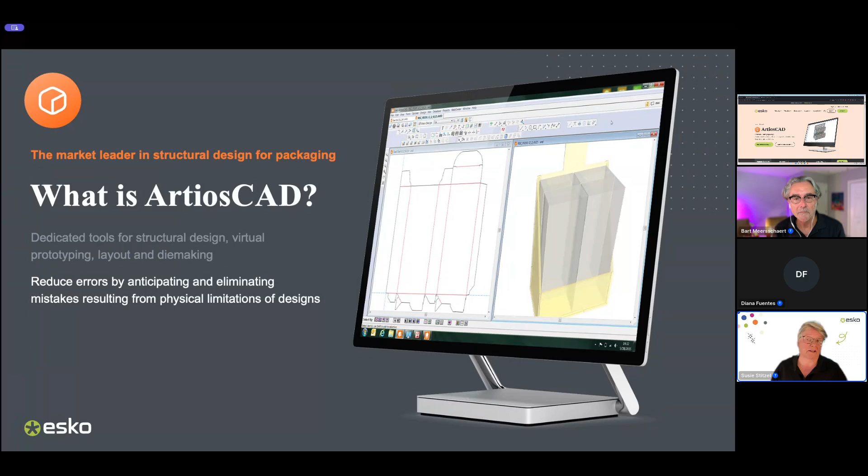A couple of things - optimized for packaging for sure. You may or may not be aware, but the product ships with a large number of standards or resizable designs, hundreds of them, from FEFCO and ECMA for example, or you can create your own. It's pretty easy to do that with these really intelligent drafting tools.

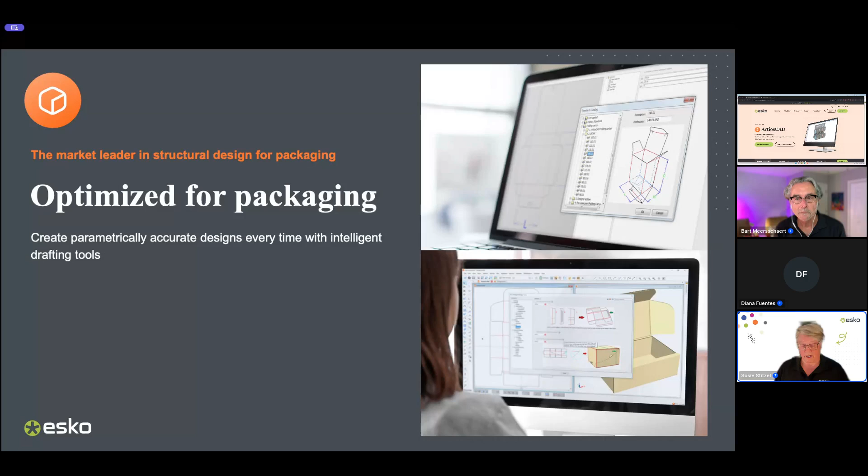There's also a really nice pre-flight tool that allows you to check a design against certain parameters. Just like you pre-flight your artwork, you can pre-flight your CAD designs and find things, and a lot of times pre-flight can even fix them for you, so that's even better.

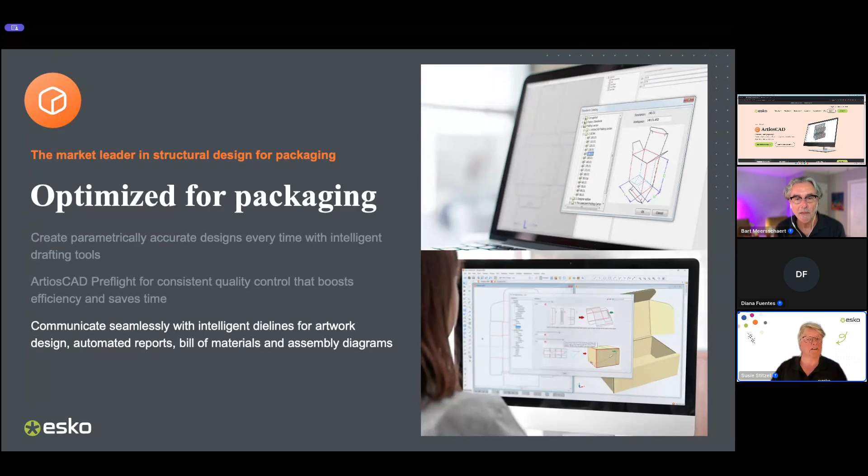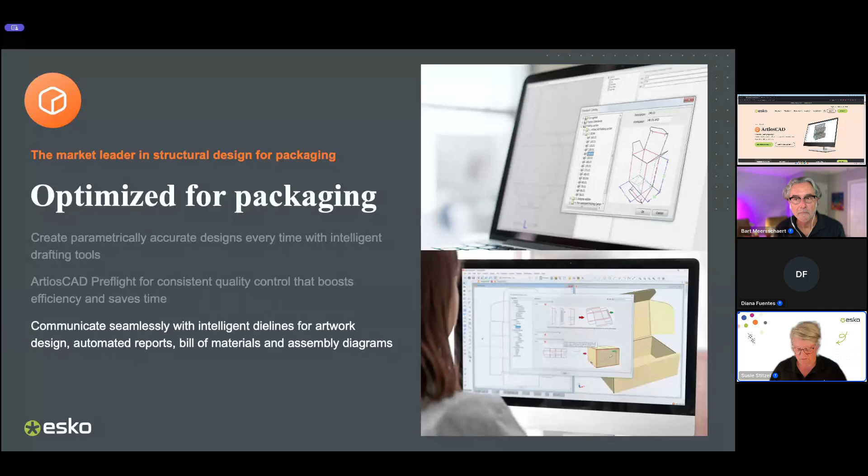We can communicate seamlessly. We can use intelligent die lines and send those over to the artwork operator - all the keep away areas, don't print here, where's the glue flap. Also inside ArtiosCAD, generating automated reports and bills of materials, assembly diagrams - all those things that are kind of extra work or grunt work, the solution can actually do for you. Again, it's about speed and accuracy.

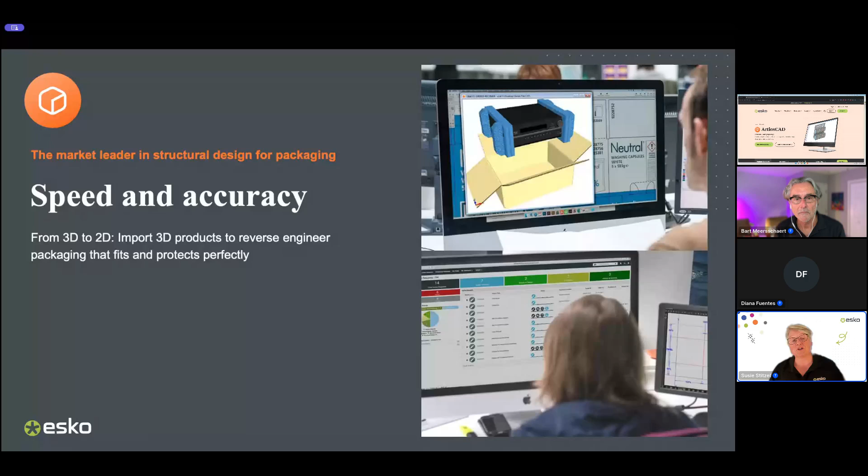One of my favorite things about ArtiosCAD is to really be able to work or start in 3D and have the software figure out what the 2D is. Being able to reverse engineer the packaging that fits and protects the product perfectly is fantastic.

ArtiosCAD also comes in a version called ArtiosCAD Enterprise. It's basically a centralized, secure database that makes your CAD department available to everyone in the company or people outside the company, sort of based on WebCenter. We're able to log in, see the status of projects, manage tasks, and all of that - bringing ArtiosCAD to a true enterprise level solution.

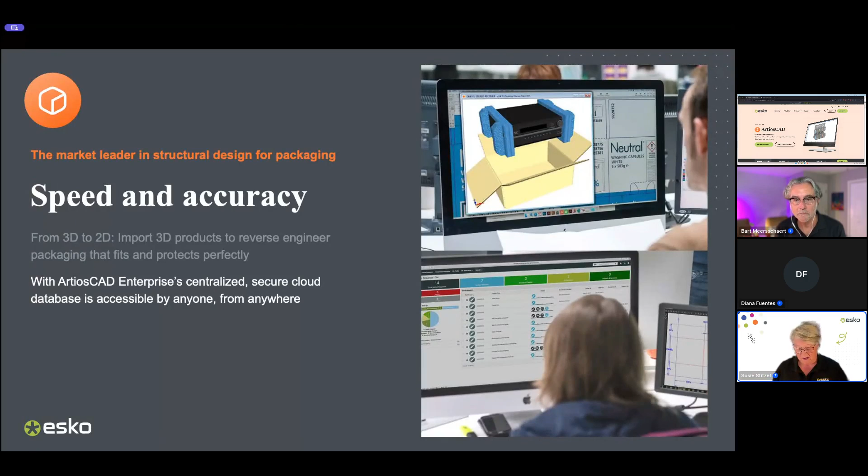So with that, I'm going to hand it over to Bart. And Bart, you're going to show, I think you said 3 tips. These are short and sweet for everybody so they can take a coffee break. Tips - so off to you.

Yeah, thank you Susie. In the next 20 minutes we'll show 3 tips and tricks. We'll start with the pre-flight that Susie mentioned, then we'll talk about how to import 3D models and create protective packaging around that. Last but not least, super excited to show this feature - it's a brand new feature we introduced in 24.03, our latest and greatest version, called Shelf Builder. So stick around until the end, and let's get started.

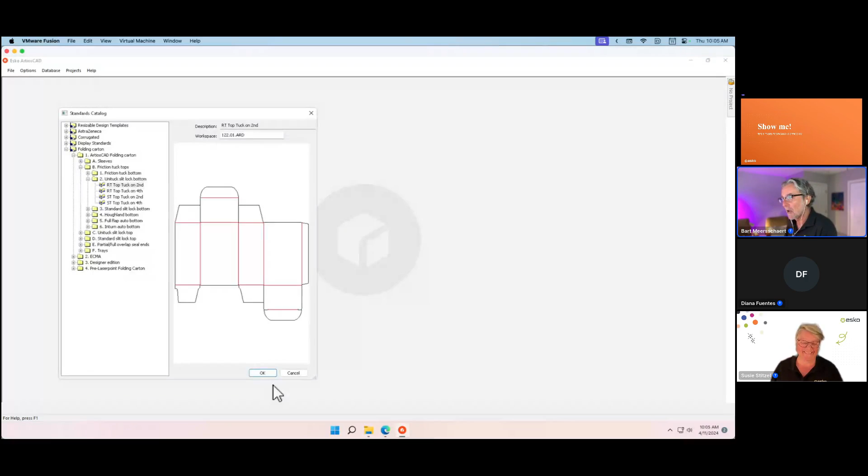So it wouldn't even be able to contain a product, I would assume, right? So here we go again. So we have our product, let's say 5 inches by 3 inches by 7 inches.

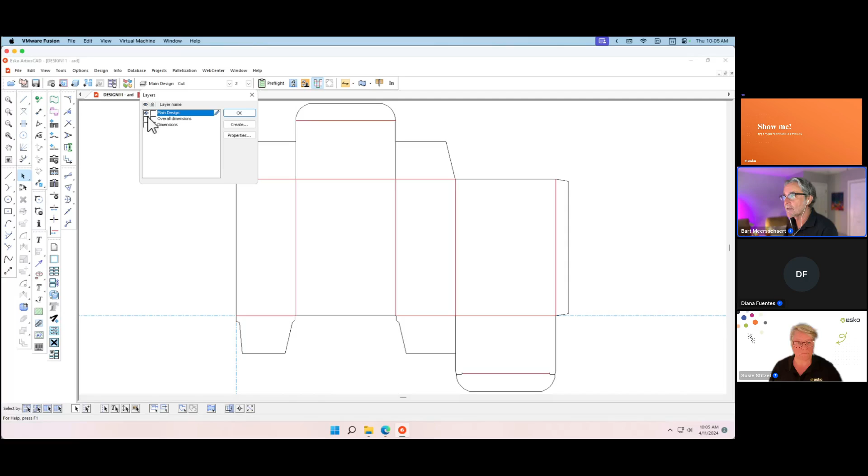Hit that OK button, and seconds later we have our 2D, and we can convert this to a 3D. So all in all, within 30 seconds, I am able to generate this design. So how powerful is that? Notice that Artios makes my life even easier by putting all those dimensions on there.

But I want to create a POP display. And for that, believe it or not, I'm going to make my life even easier if that is possible. And it is, because we have this feature called Download from Display Store.

As soon as you open that, a web browser opens with a POP display store model, different categories, not only point of purchase but countertop displays. These, unlike the standard catalog, you have to purchase. But again, when you look at the price, they're not going to break the bank, right?

So I found this really nice display. I downloaded it, and I'm going to open it up now in ArtiosCAD. And here it is. As you can see, it's a point of purchase display.

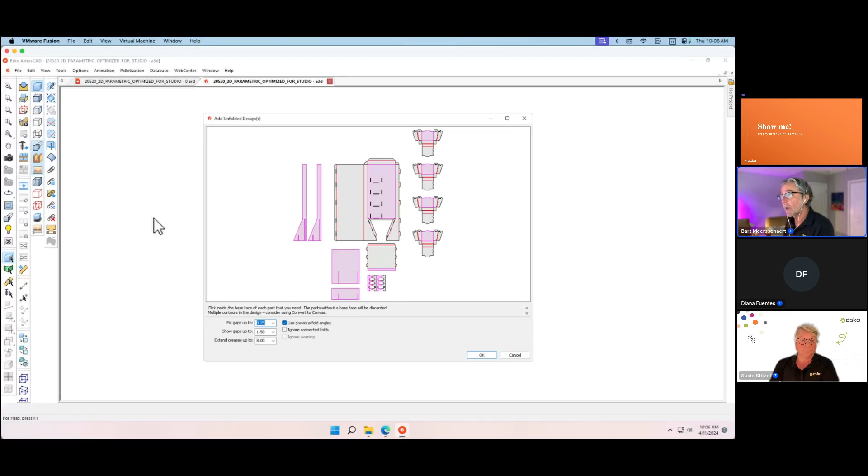It's multi-component. So again, we're going to go through that exercise of converting that from a 2-dimensional layout to a 3-dimensional object. And again, look how quick we can do that, right? We have 2 tabs open.

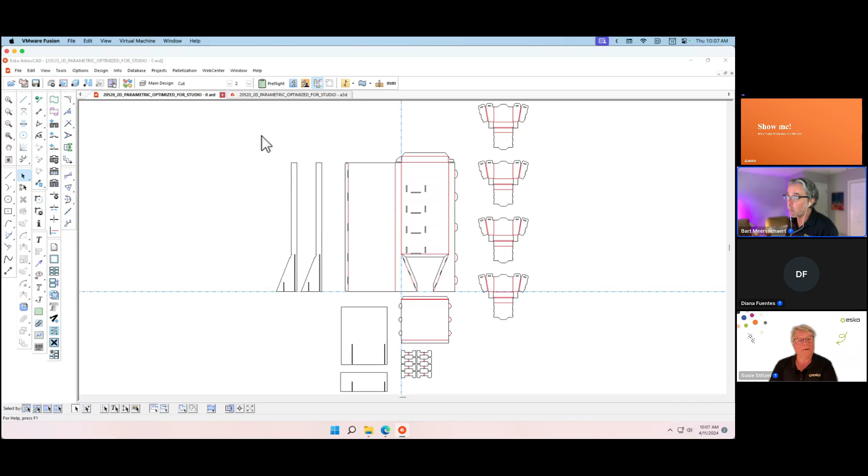And this is the point in time where I want to start looking at the consistency of my design, right? In other words, I want to go ahead and pre-flight this. Now, you're probably wondering, why would you want to pre-flight this? Well, pre-flight will really help you find problems early on in this design life cycle where you can find anomalies that might occur during finishing, right?

Maybe during gluing or during cutting or waste, right? And in order to do that, we are using what we call profiles.

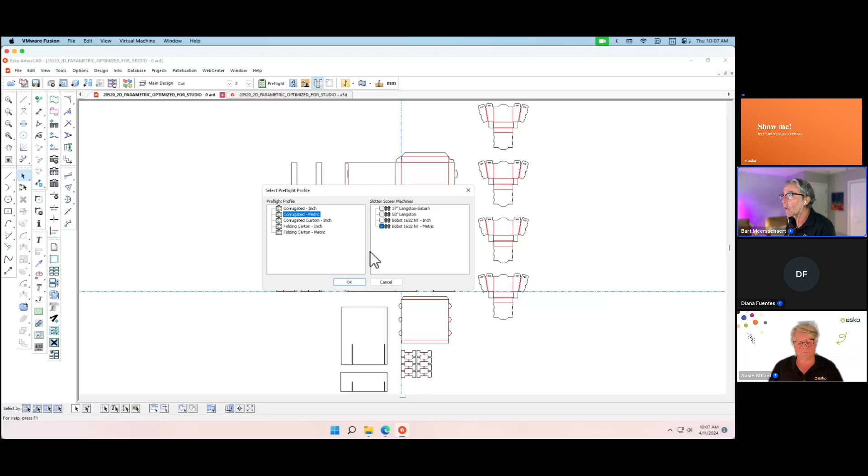Now you can see that pre-flight, by the way, you can download today as a 30-day free trial. So go ahead after this Livestorm event and find this on our website. And you'll find that the software comes with a limited set of profiles.

Now you can create your own profiles. And once you run the set of rules, the software will analyze your design, and it will tell you if it found certain anomalies that violate those rules against which I am checking this.

You notice that there are quite some problems. When I click on each one of them, the software highlights where those problems are located.

So if I right-click here, for example, and I say, hey, go ahead and zoom in, I can see that indeed there's a line that was created here which exceeds my design. So that definitely is a problem, right?

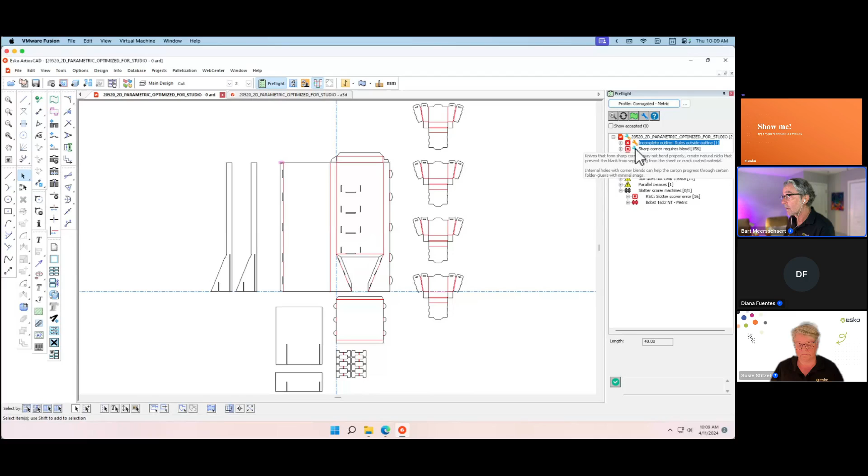So you also notice a little wrench before this error message. Now, sometimes the software will be able to fix these things for you.

So what I'm going to do is I'm going to right-click here and I'm going to say, hey, by all means, go ahead and fix this for me. Continuing on with that exercise, I'm going to also fix all these other problems that were listed.

One other thing I'm going to do once the software has done fixing this, and as you can see here, it automatically removed that line.

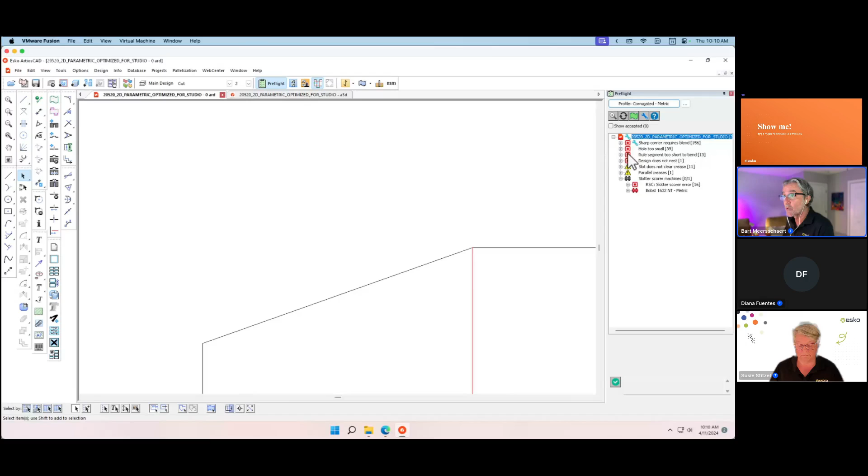Certain things, like for example, hole sizes which are too small, where does the system know why it's too small? Well, remember I talked about profiles.

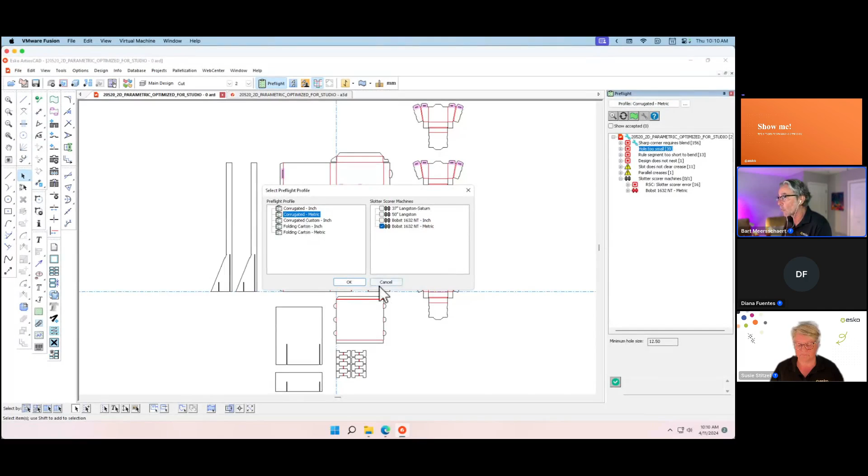So you can click on that profile, and you can see here I'm using this corrugated metric. You can open up all the settings for that profile. And here we can see the rules relating to minimum hole size, right?

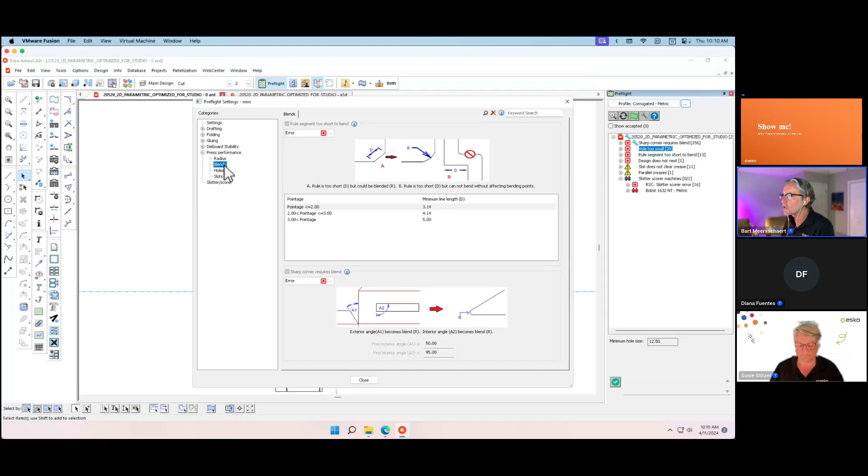So I define that as a caliper that is equal to or smaller than 3 millimeters right here. In the case of pin, here's the pin diameter. And so we're not going to spend too much time, but you can see that all these settings cover the majority of things that you want to verify your design against, right?

Now you can also say, hey, I'm going to go ahead and accept because I know that 3 millimeters is good enough. Every time I accept something, I can specify a message down here, which will be saved together with the pre-flight, so the next operator knows that I've accepted this. And in this case right here, I'm going to fix all these if possible.

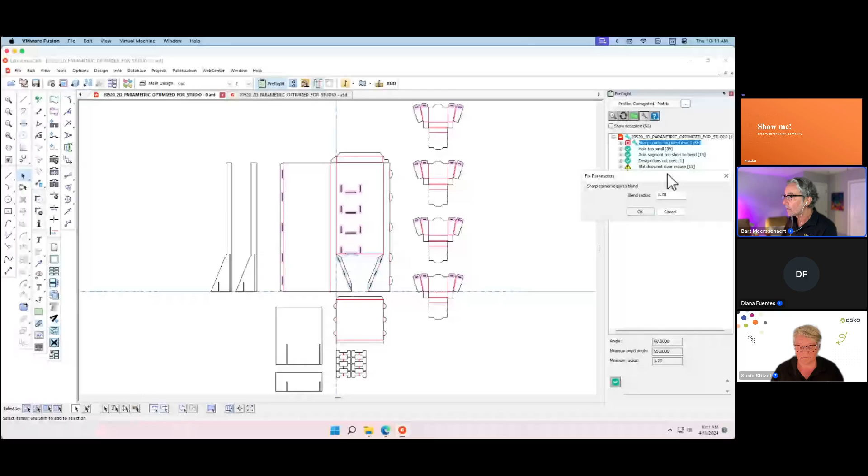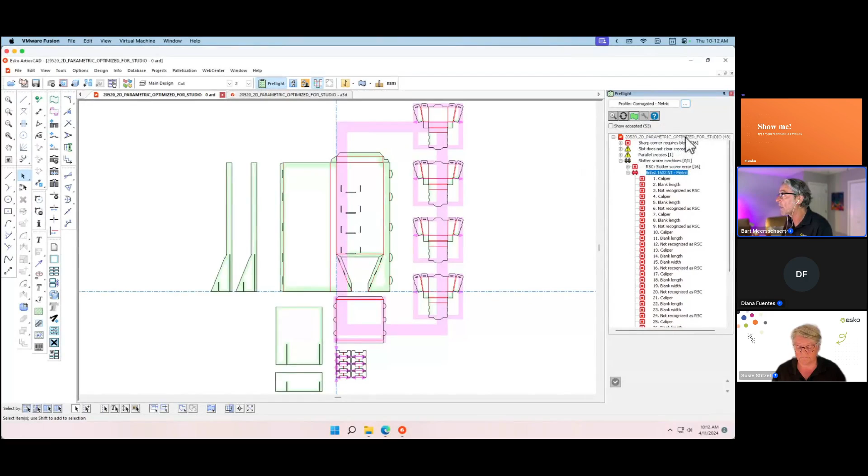Also, the finishing machines can be specified, like a slotter-scorer machine, a Bobst, which I have in my plant. I can verify if this design is going to be printable against that. I can also look at the continuous boundary of my design, that's the green option you see here.

Once I'm happy and everything is done properly, I'm going to save this and hand it off to my graphic designer. Even better, I can publish it to our cloud-based approval system called WebCenter. Once it sits in the cloud, my graphic designer will be notified that file is there, and he or she can switch over to Adobe Illustrator and place that multi-component ARD file right in an Adobe Illustrator document. You'll remember from our first session, for that you need the free data exchange plugin.

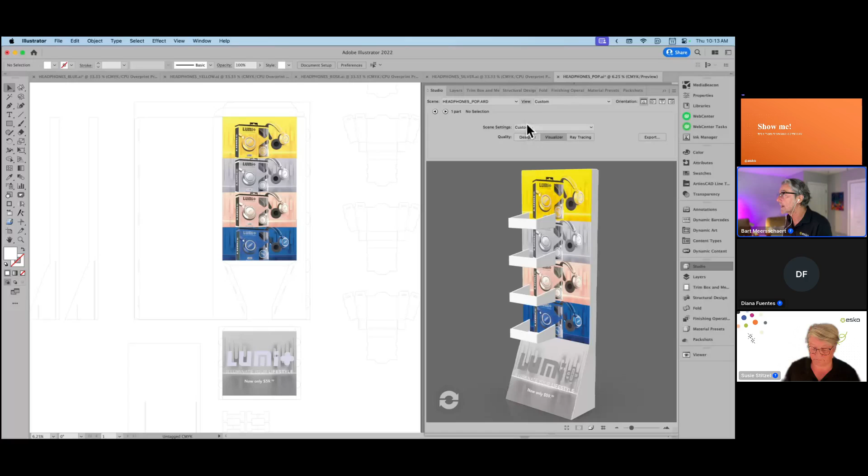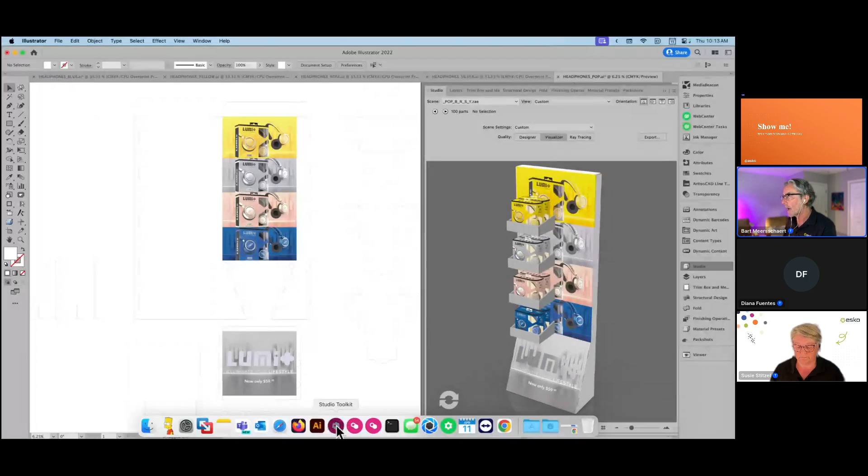If you do that, you can go to a visualizer mode where you're able to see this POP display, and we can add these individual headphones. There seem to be different flavors, four different colors: blue, pink, silver, and yellow. Using our Studio Toolkit, which you might remember from our first demonstration, I can combine these individual elements.

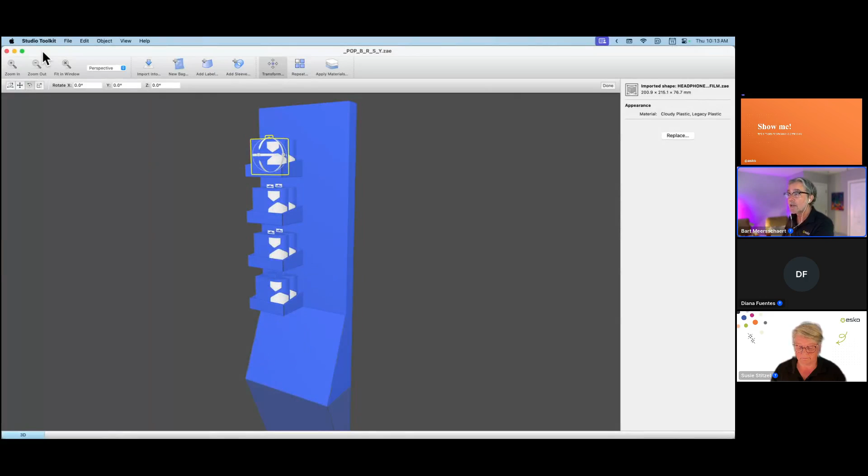As you can see, I have full control in a 3D space where I can position those very accurately. We also have some great shortcuts where you can get a really close-up view of how this POP display combines. Once you create these scenes, as we call it, you can go back to Adobe Illustrator and place that scene just like a director would create a scene in a movie. We are generating that scene here.

Ultimately, I'm going to generate a ray trace image. I've done that yesterday in preparation for this demo, and you're not going to believe it, but this really incredible looking image that you see here on the screen. Let me move it to my other desktop.

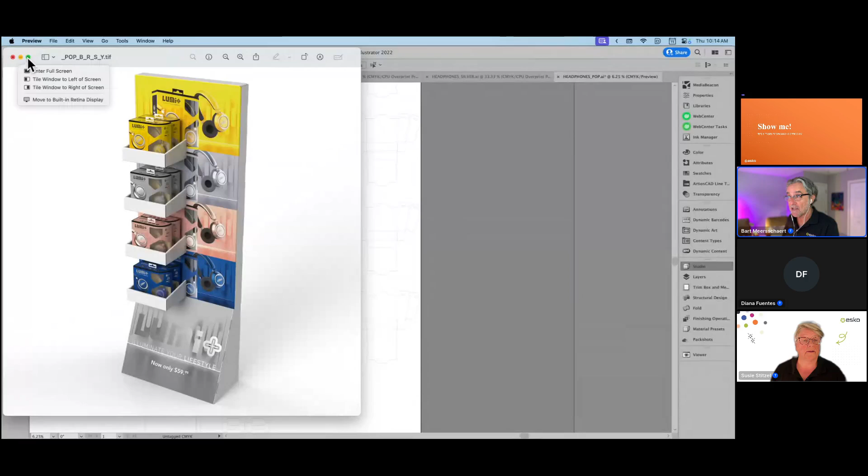This image preview has taken the Esko Cloud Render engine only 12 minutes. That's pretty impressive for this amazing image. I can zoom in a little for the audience, and you can see how the shadows softly cast. You can even see the cloudy plastic protecting the headphones. So, 12 minutes to generate this POP display.

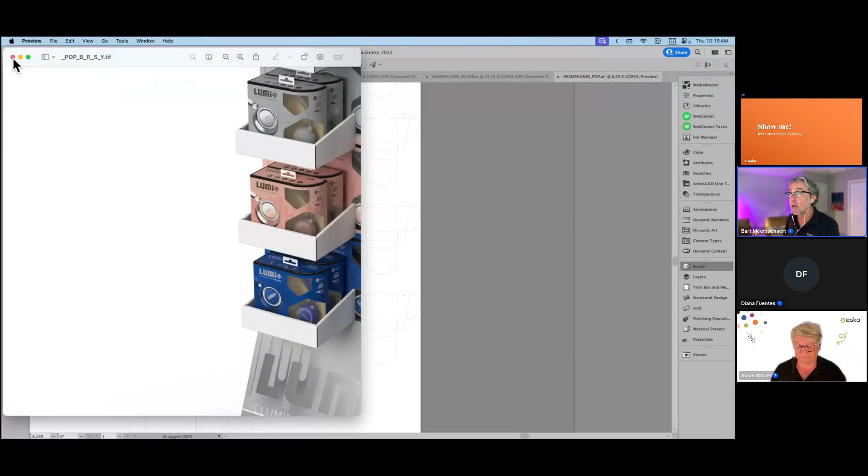And that happens, by the way, in our cloud. At any point in time, you can go into that cloud and see the queue where you put these renders in, and you can see it indeed only took 12 minutes. Pretty cool. Let's switch gears now after this pre-flight, and let's start talking about 3D designs.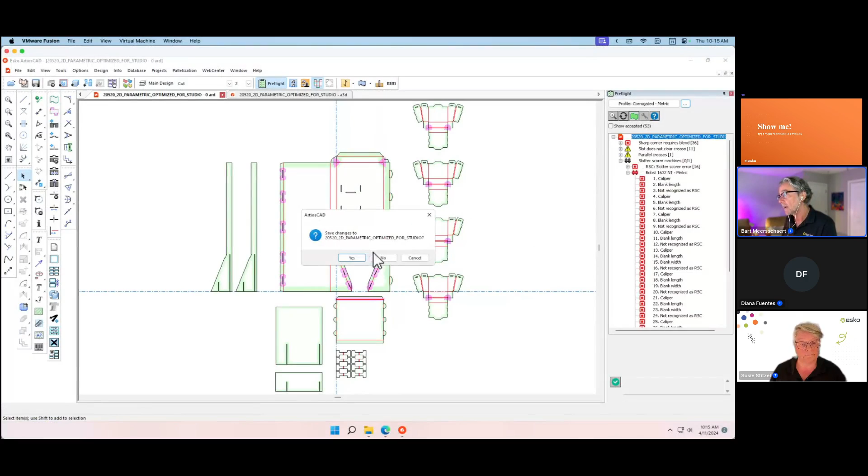3D objects, having the ability to import those, is a feature only available in the Prime version. You might notice that ArtiosCAD comes in three flavors: Essentials, Advanced, and Prime. For this exercise, we're going to import a file that was produced in a third-party software.

There are many softwares out there in the market, and as you can see, it's quite the alphabet zoo, anything from ABC to XYZ. We have all the usual suspects: CFF2, DXF, Step, IGES, Catia, Pro-E, and SolidWorks, very popular in our industry, STL format, OBJ, another popular one, and then we have the Esko formats.

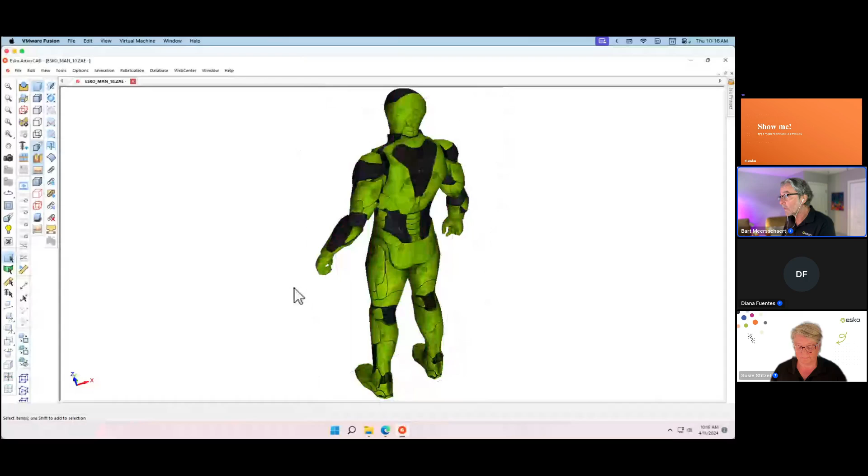So Prime gives you a really wide spectrum of file formats that allow you to import mechanical objects from your R&D or product design. Here you can see I have a figurine. He looks very familiar, a little bit like RoboCop. He's got the Esko logo on his chest though, so that looks pretty cool.

What we're going to do here is quickly generate some protective packaging around this model. I'm going to go into an orthogonal view and rotate this facing on. The very first thing I'm going to do is define the bounding box around this object, so we are not going to cram this action figure into this design. I want to make sure, let's go ahead and switch back over to inches here.

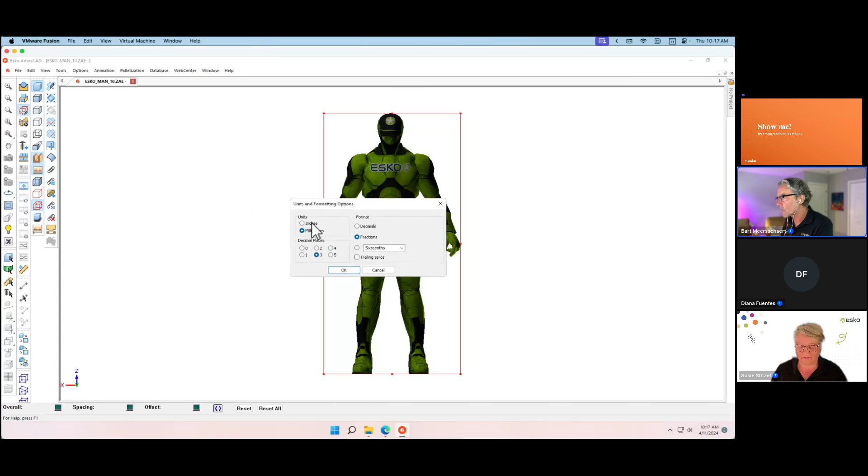My default is set to millimeters, but as you can see, you can very quickly switch over. So let's give this a little bit more breathing room in that packaging. Same thing I want to do for the width of the package.

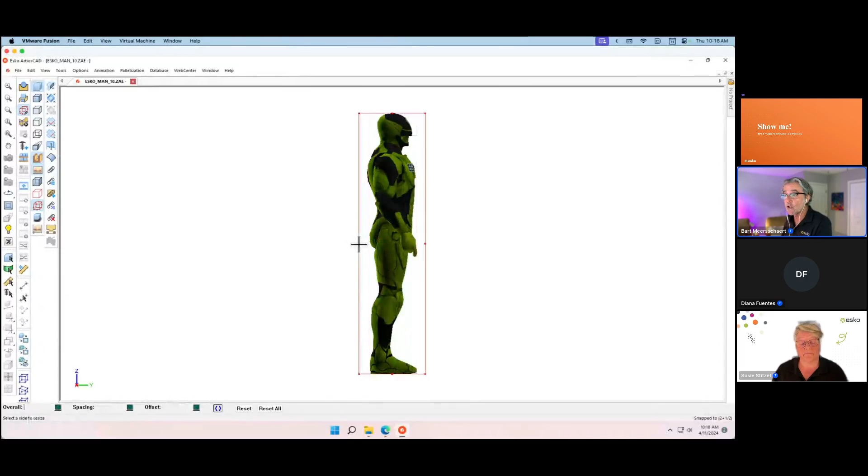So let's go ahead and go with 2.5. Here I am manually doing this, but in the lower left-hand corner, you can see that you can also do this numerically. And then here, the height, we're going to increase to 10.5 inches. So we have 5.5, 2.5 by 10.5.

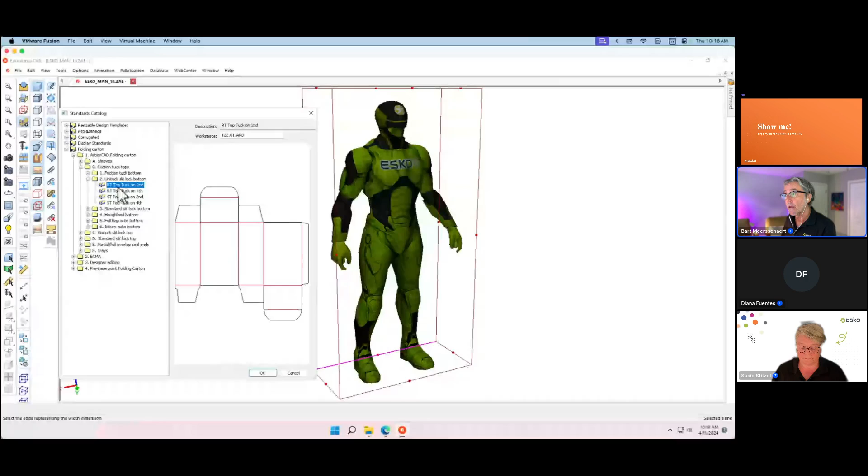So after I've done this first exercise, the next thing I'm going to do is indicate which my packaging needs to be. So I'm going to run a standard, and in order to do that, the software needs to know what is the length and what is the width of this, after which I can now pick my type of packaging I want to create around this.

And we're going to pick from this standard catalog the friction tuck right here. That looks like a neat package for that. Again, we need to indicate the material.

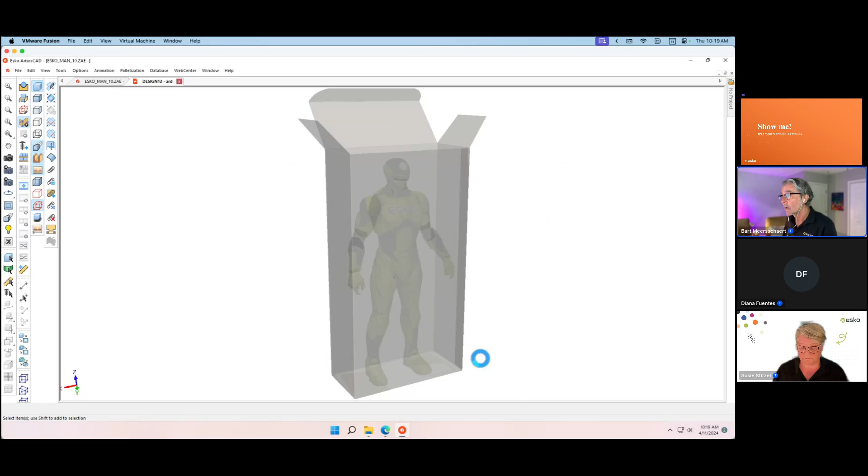And seconds later, we now have our protective packaging. How easy was that? I can even put on my X-ray goggles and see what that product looks like. I have a transparent view here, which I can hide. And of course, we have full control in 3D space.

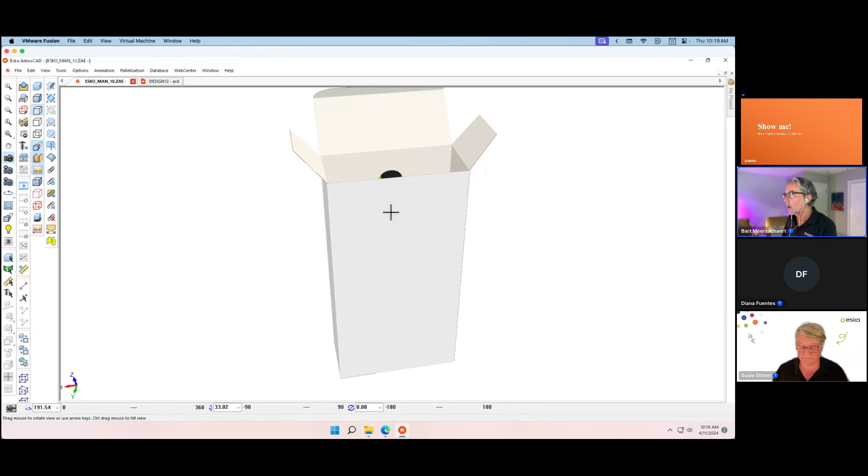Now, I want my consumer to actually see this figurine in the box, so we need to create a see-through window here on the front. Now, as a designer, it's sometimes difficult to figure out, hey, is this the front or is this the primary side? So at any point in time, Artios allows you to add additional elements to this design.

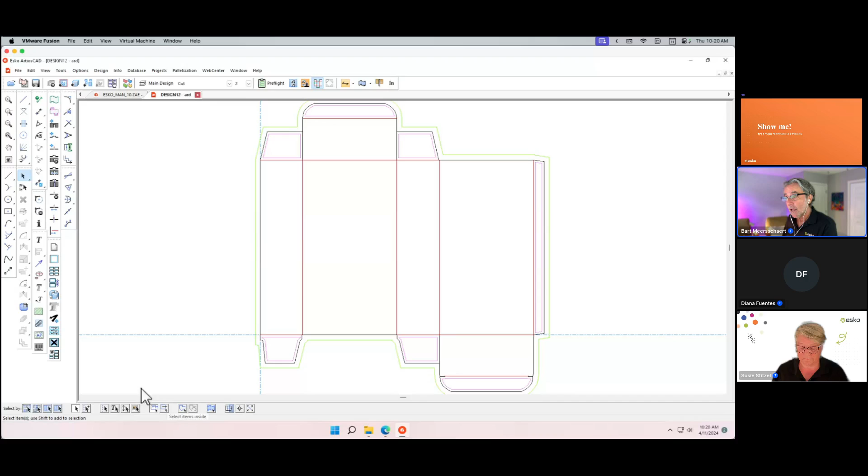Such as varnish-free areas, bleed areas. So we know we want to keep these areas varnish-free, especially here, this glue flap, the top right here and these two flaps. We want to keep varnish-free. And I also want to specify the actual artwork panel direction.

So now we know for sure that this is going to be my front panel. And we decided to create a little see-through window.

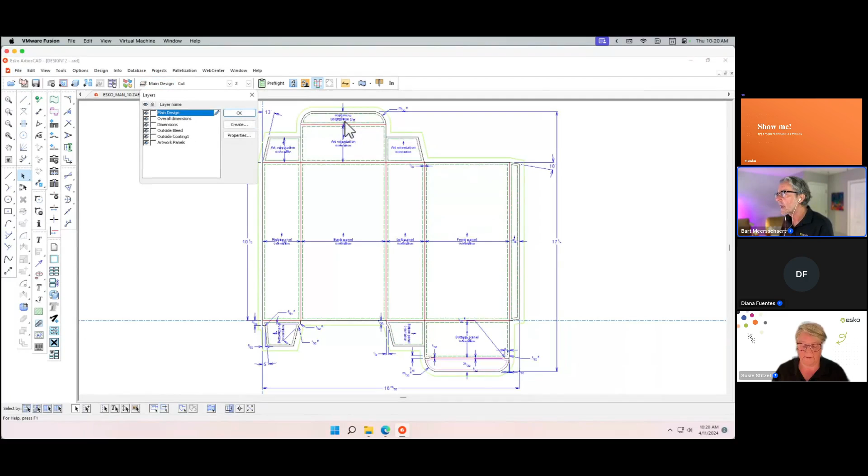Now I know that this flap here on the top is 7/8, right there, so I can hide certain information, and I can see here that that's 7/8. So I might want to quickly build a guide here and bring that down to 7/8. I can type that myself here and hit enter.

So now I have a guide that will let me know how far I need to stay away from this center right here. So as I create this, I know that I cannot go any further than this. And let's accept that like so.

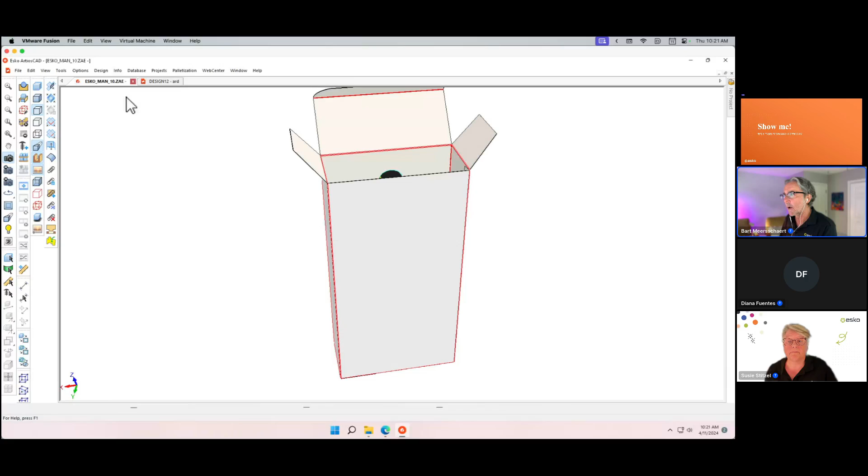Again, I could do this numerically, but to speed up the demo a little bit, notice also that I assigned a cut line. So if you switch back right here, we'll now be able to update this 2D back into a 3D right here.

And the software will now automatically update this design that I made, like so.

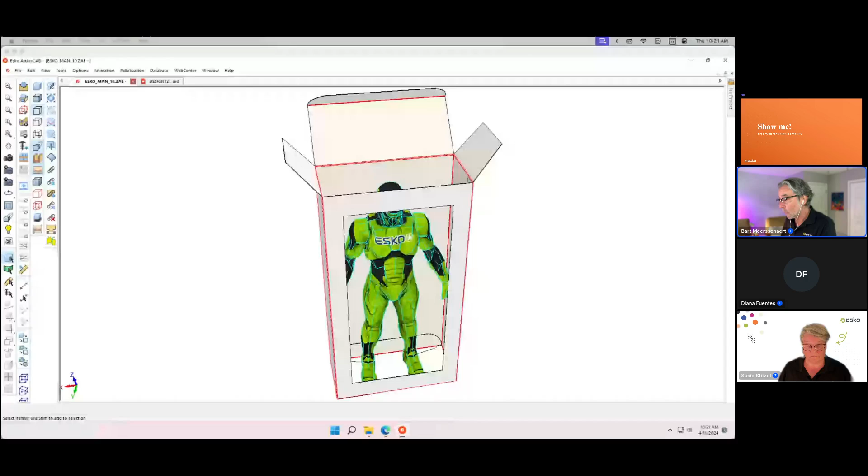So super easy. And also let's not forget that Artios allows you to do other things like, for example, place foam inserts into this design. So that way, whenever you want to add additional elements to this design, you can go ahead and do that. That could happen either with foam material or a corrugated, for example, a cut through.

So last but not least, the feature that we have included recently in our last release, 2403, is called Shelf Builder. In the meantime, the foam insert here is opening up.

Let's go ahead and see if we can quickly visualize that. There it is. So you can see that—let's hide this—you can see that the feet of the figurine are automatically cut through. And of course, I can round this off a little better to make this nice and seamless.

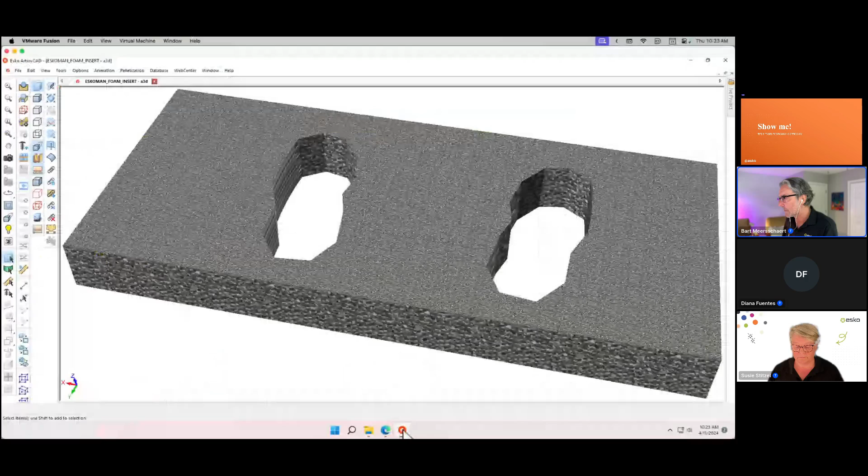Okay, you can see also I have 2 versions open, so let's go ahead and close this. We're not going to save this. And here's my 2D.

And last but not least, let's go ahead and open up our 3D right here for our shelf. I've already gone ahead and prepared this so you can already see the purpose of this shelf builder. It really will help you save hours and hours of time when you have 3D objects and you want to build a POP display.

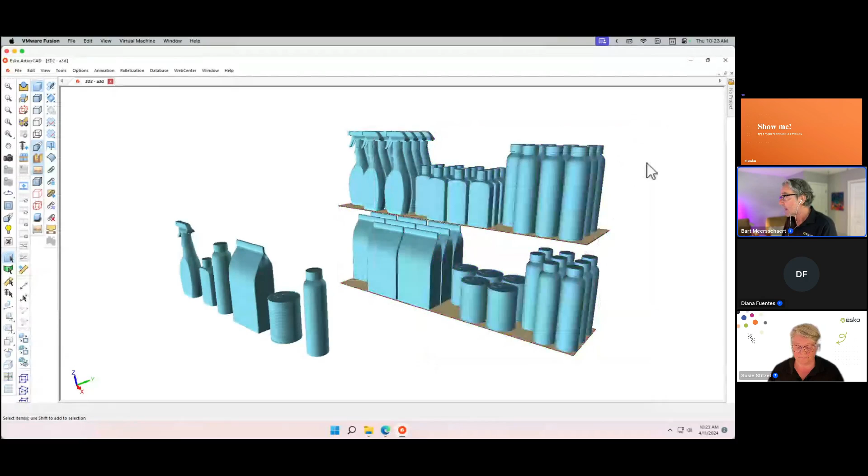So let's see how that works. Let's go ahead and select this one right here, and delete that. Let's start by selecting our new feature, the shelf builder feature.

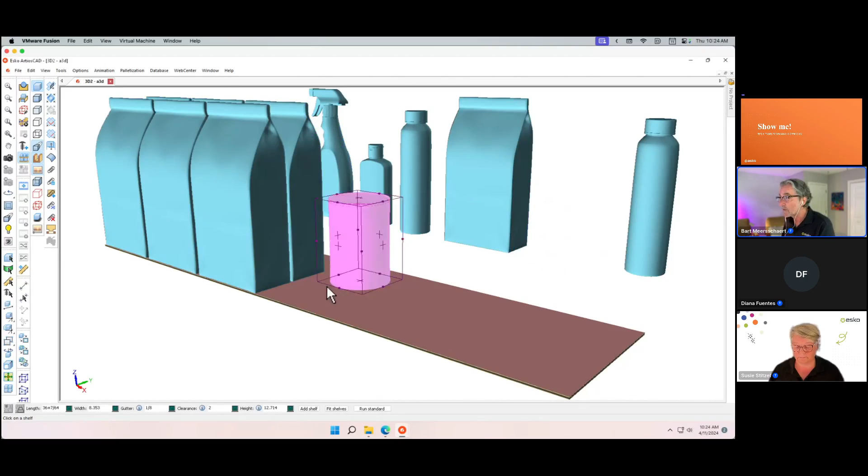The software will ask me to go ahead and put a product on the shelf. So here I want to put 3 of these on the shelf, and as you can see, they only go 2 deep. That's great. Then I want 3 of these cans. So easily pick that out here and position it like this.

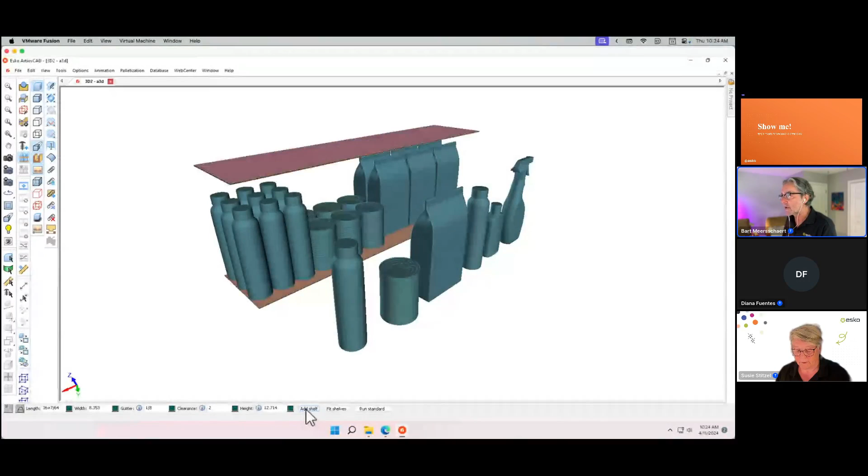So very quickly, I can create one specific shelf. Now I'm going to go back to this feature and tell the software that I want to add a shelf. Obviously, you can specify all the characteristics of that shelf.

So after clicking on Add Shelf, I can simply repeat this exercise and create a second shelf right there, with 3 objects of those. Then we have this bottle right here, and we want 4 of these. There you go. And last but not least, this is our shampoo, and we want this like so.

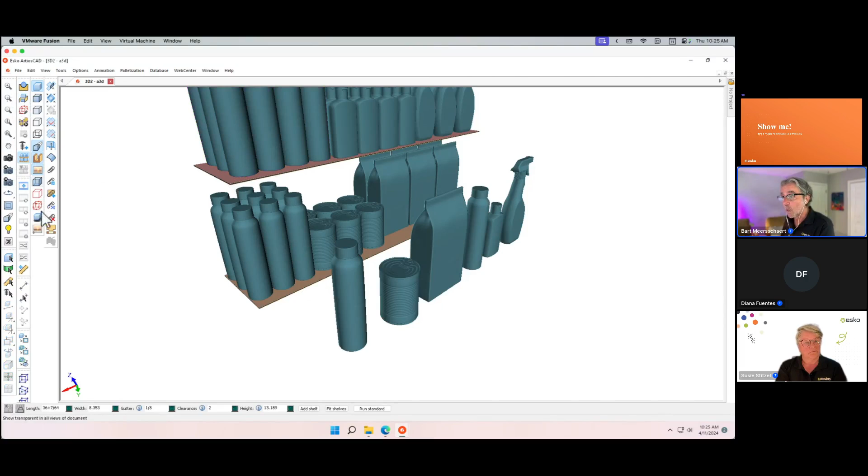Once this is done, I'm going to select these objects that I imported originally. These were OBJ objects that I imported. You can see now that I can finalize my exercise by going one last time to this option, and now I'm going to run a standard.

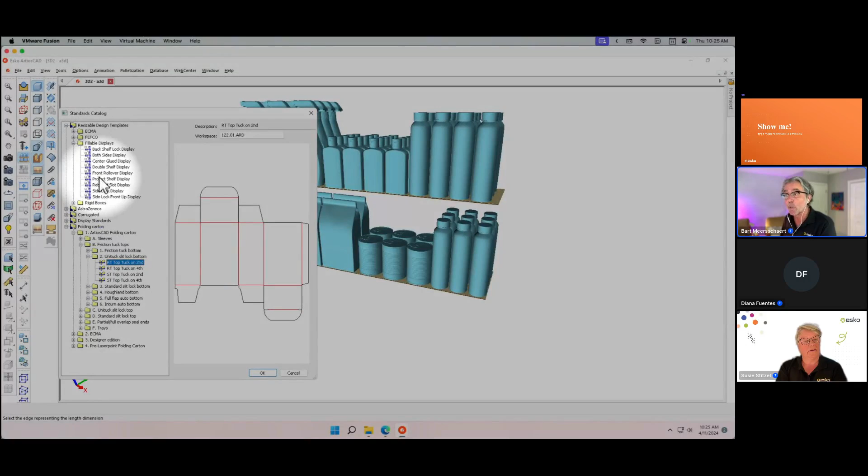Now keep in mind, this standard needs to be a resizable design template. It needs to be a fillable display. The new update 2403 comes with these. Let's pick, for example, the centre glued display. And you'll see now that miraculously the software goes to work, takes all these shelves, these two shelves, all these products, takes the design, resizes it, and creates my final POP display.

All this literally in minutes. We went to customers and heard that some of this can really take up to hours for structural designers to create. Now I gladly wait 1 or 2 minutes for this to generate for me. And once this is generated, you'll also notice the software allows you to create a bill of materials based on all those elements. So pretty powerful.

We also added some new tools in the canvas part of the software. So all in all, really great feature, really great topic that we like to share with the audience.

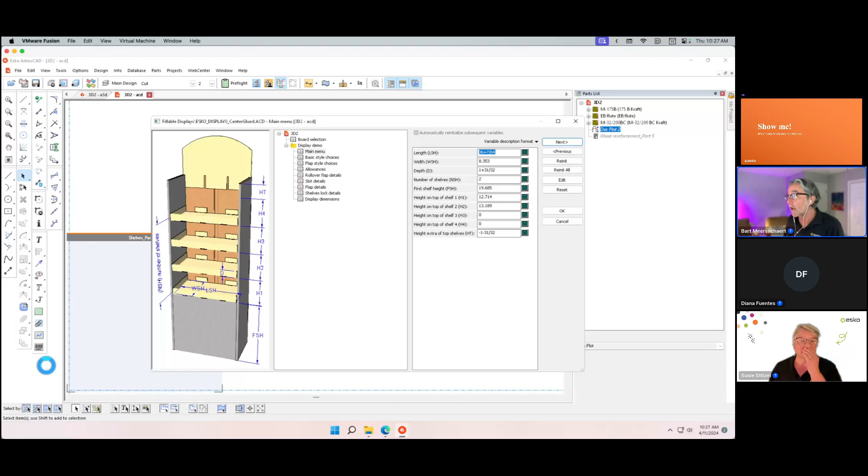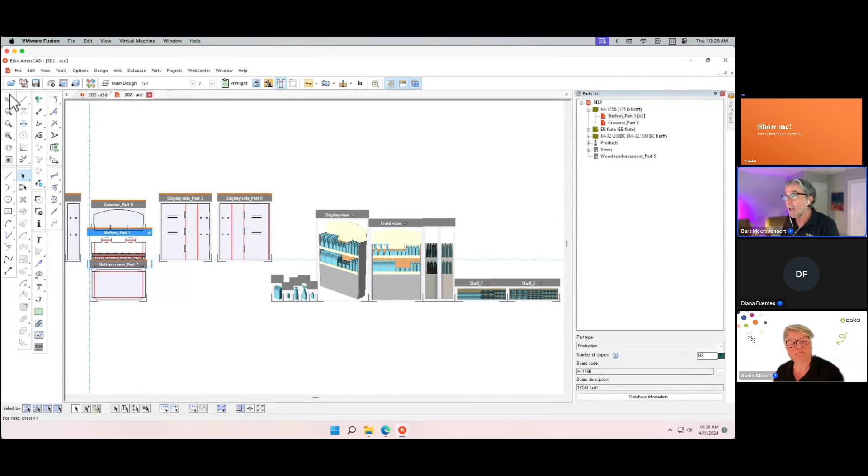And in this last demo, we've noticed that we can automatically generate multi-component shelves starting from different 3D models, and the software will automatically combine all this in a final layout for me. There it is. So again, gladly wait a few minutes to see how all this comes together, even including a detailed description of all the parts that make up this POP display—an entire bill of materials.

Okay, wow, let's go ahead and open it up, Susie. I believe you have. Wow Bart, that new feature is really something else. People really, really like that quite a bit. So thanks for tipping us off there.